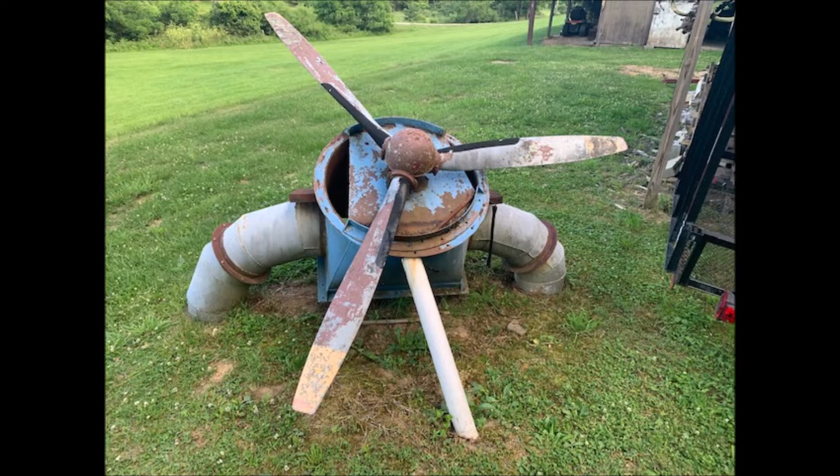Backstory on it: a good buddy of mine just bought a house, and the previous owner had this lawn art out there. I'll roll a picture in. He was going to use it to power an air pump, or aerator pump, for his lake. It was a free-spinning kind of thing on some bearings, and basically they wanted it out of there.

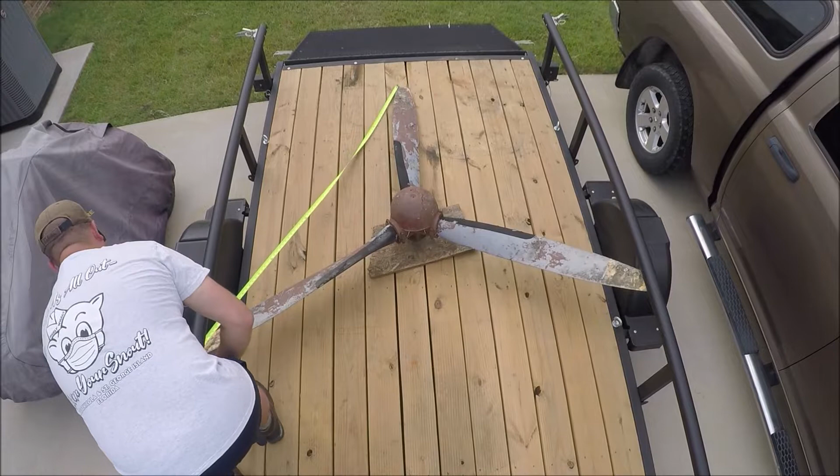It looks in pretty good shape from your guys' vantage point. From tip to tip, you're looking at about 7 feet. I'll get you guys a closer look and show why that's probably not an accurate reading for the dimensions of this prop.

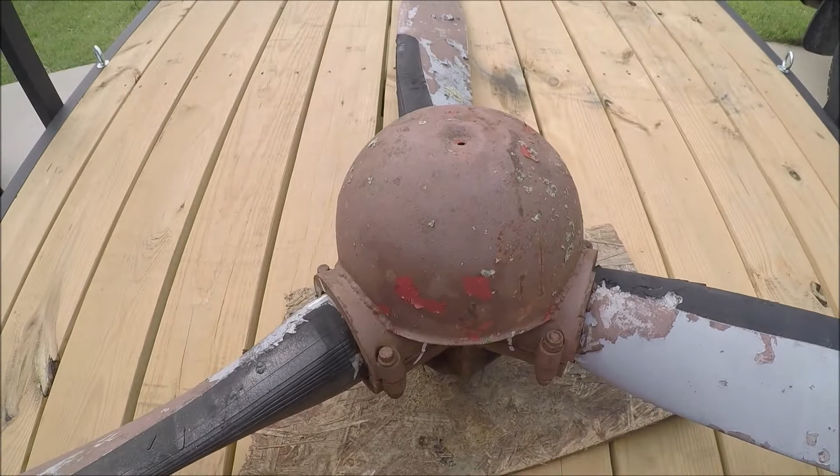Okay, with you guys off the tripod, let's take a closer look here. This by all means is no dome or spinner assembly for the prop. Looking a little closer, you can see we've got a nice bead of weld going along here for these mounts. Now these mounts look true to the prop. We've got our 12-pointed bolts, and you can see we actually have our indexing locks, a couple of them right here. This was what really clued me in, when he sent me a picture, that it's actually an actual prop.

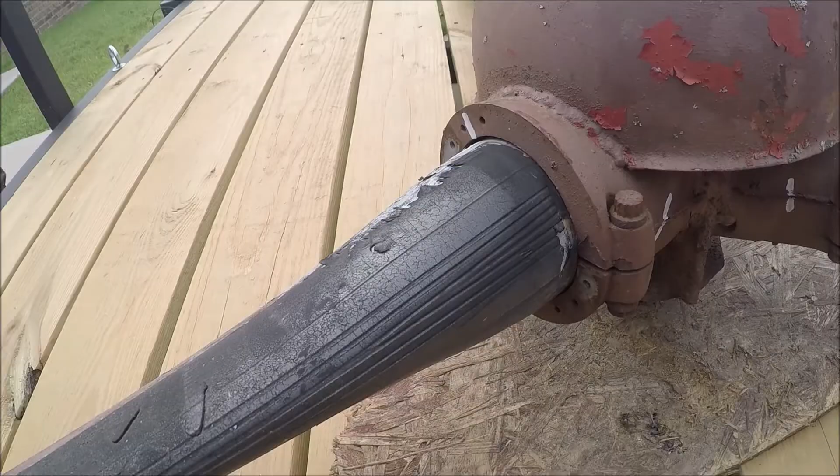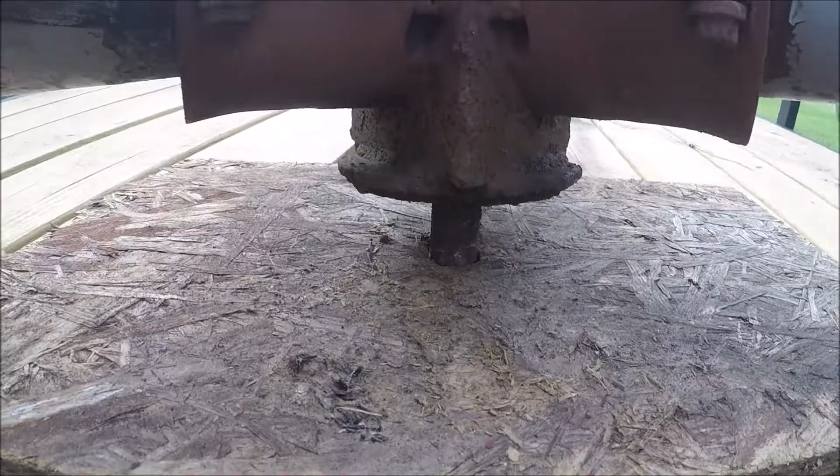If we look a little closer, we come down here and start seeing that these actual clamp assemblies are welded to whatever structure this is down here. Underneath here, this was just a solid steel shaft that ran down to 2 bearings, and the thing spun pretty freely. But as you can see, everything from about this location inward is not the correct assembly.

You can see the boots are still present, but they are degraded and chipped away. The tips, you can see, were several colors at one point - this gray flat paint, and over here on this blade you can even see we had some moss, or I believe it's lichen, from the trees growing on it. But you can also see the paintbrush strokes.

Now it did have some damage. I did drive this a good amount of distance. Some of these blades did have damage before - you can see on this tip there's a little bit of deformation. The other two look like they're somewhat intact.

But the course of action I'll probably take here is to cut this apart, grind these welds down, make that look a little more presentable. If I can, separate those clamps, pull the blades out so I can work on those individually, and then cut it free of those - well, it'll all have to be cut free of that central support structure as well. Find a part number or serial number on here that maybe I can reference, and then take that information, get a spinner assembly for it, line it up, and kind of cobble something together on the inside.

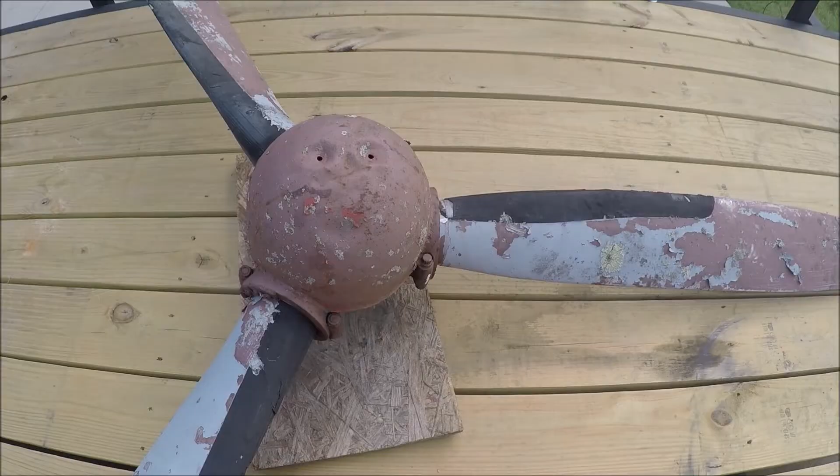Then let's get out of the heat, and I'll show you what my plans are for mounting this thing and presenting it up.

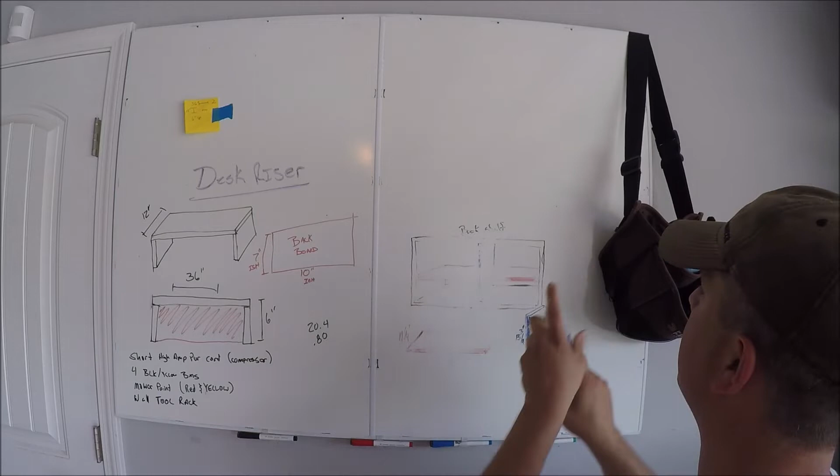Alright, like I talked about outside, one of the stipulations to me keeping this is that I make it look nice.

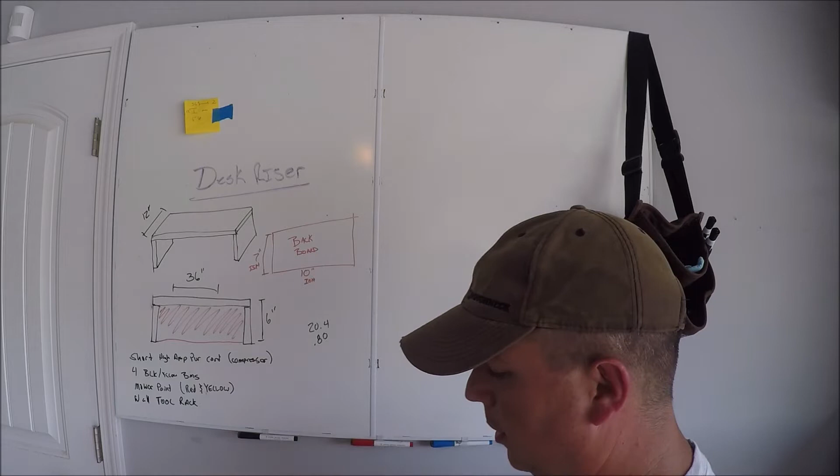What I plan on doing is strip the prop down with some paint cleaner, get all the crud that's on there, and see what the condition is of the aluminum. Once I figure that out, I can work a process of either polishing it, or painting it all flat black and kind of make it look like a DC-3, kind of like the channel icon there, right?

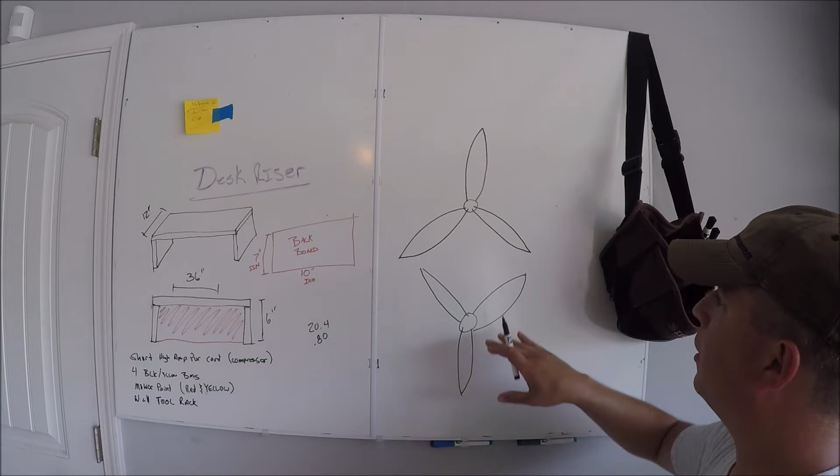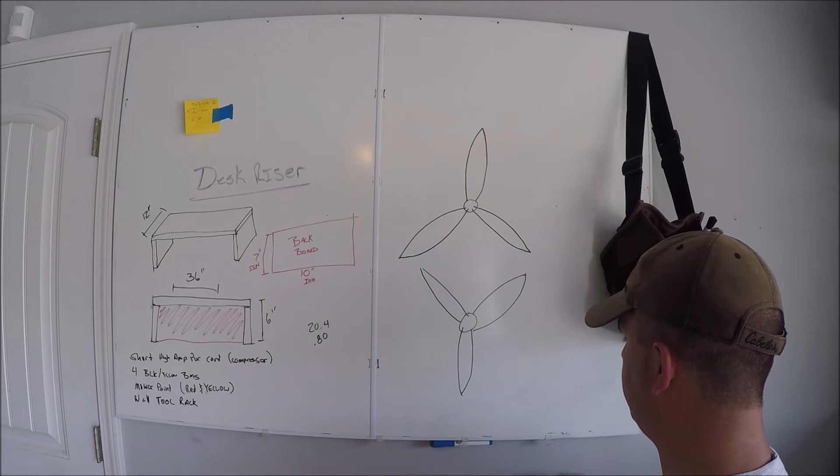So the prop is going to sit either like this, or this way here, which is going to be a little easier to do and hide the superstructure. That's the overall theme - I kind of want this floating out there. Now it's not going to be moving or anything like that. The way it's going to be mounted is, if this is ground level, I want ground level to be just about where that prop is, the end of that prop blade.

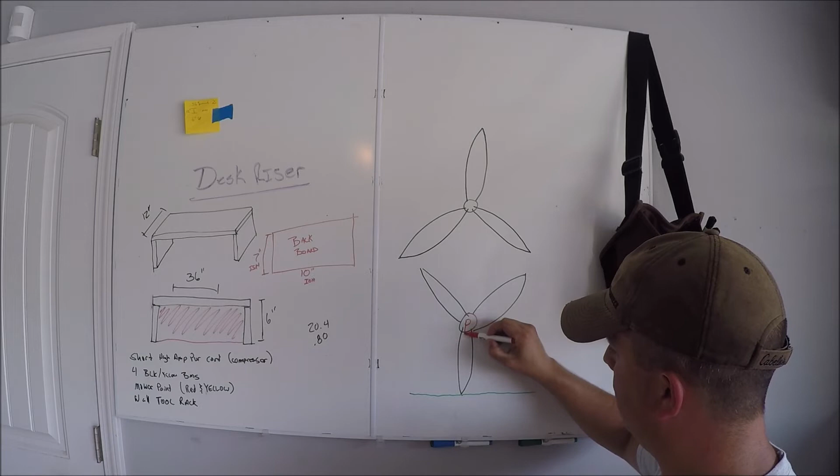And once I do that, red's going to be the actual support here. I'll build a mount that goes in the back, mounts it right behind the spinner assembly, and then a single pipe that comes down and hides neatly behind the prop, that prop blade.

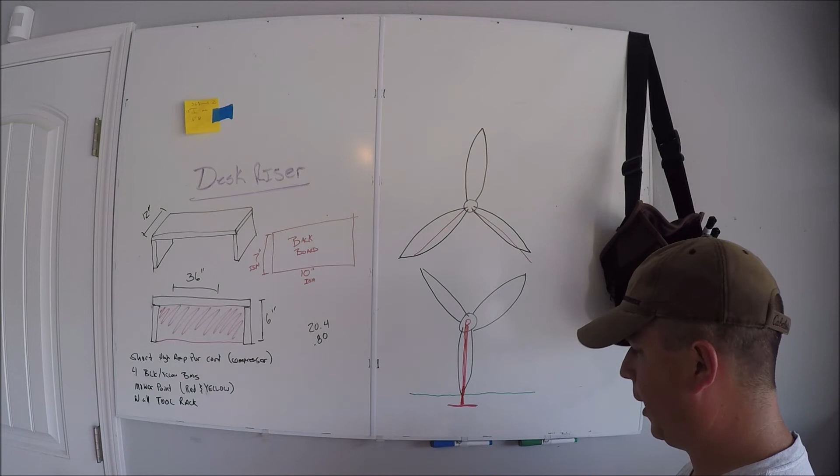The other thing I'll have to do is have some sort of anchoring down here. I figure I'll go down about 1 foot, put, I don't know, maybe a flywheel from like a truck transmission or something like that, and bury that on a nice steel pipe.

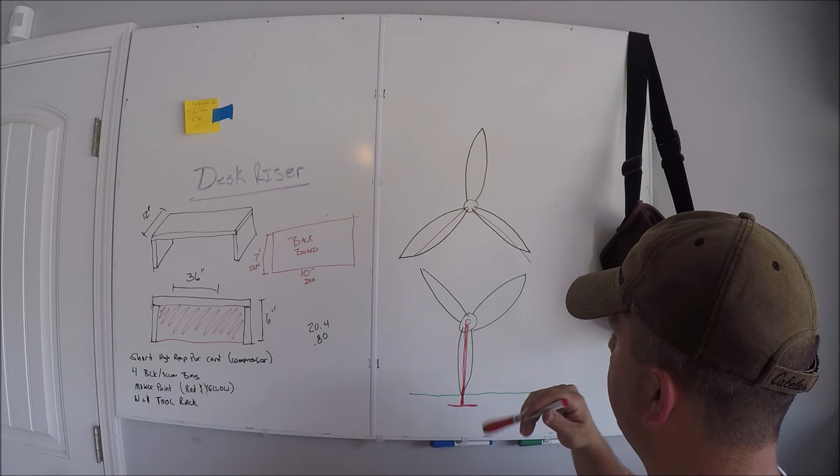Yeah, it's gonna go right in the garden area. That's the plan for it - we'll see how it progresses. I'm gonna have to procure all the stuff to clean it up. These blades are probably gonna have to come off like we talked about, with a 3-bladed spinner assembly, something like that. And yeah, all this stuff to dress it up. So let's see how this project progresses.